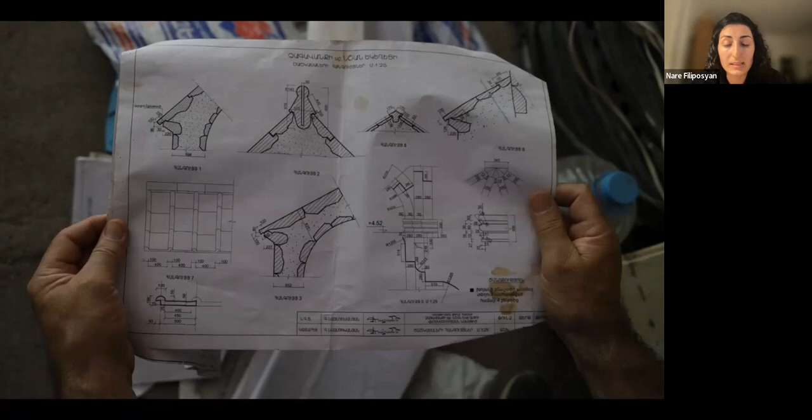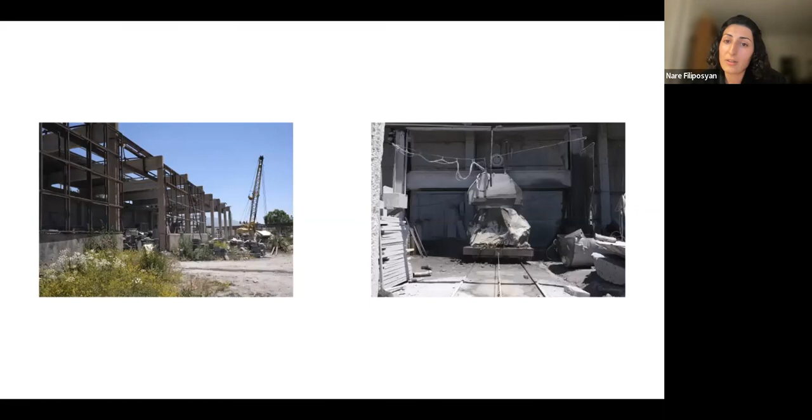The research underlying this thesis was an attempt to understand an existing culture of stone. It involved interviews in Armenia with masons, visits to medieval churches, quarries, stone cutting facilities, followed by remote conversations and my own experiments as a way to understand the techniques at play. The research is the basis for the proposition that I'm making for returning to stone.

To give you a glimpse, I'll share a 3-minute film of an extended conversation that I've been having with a mason. And if you speak Armenian, you will catch moments of frustration in his voice when I ask questions that clearly show a lack of an embodied understanding.

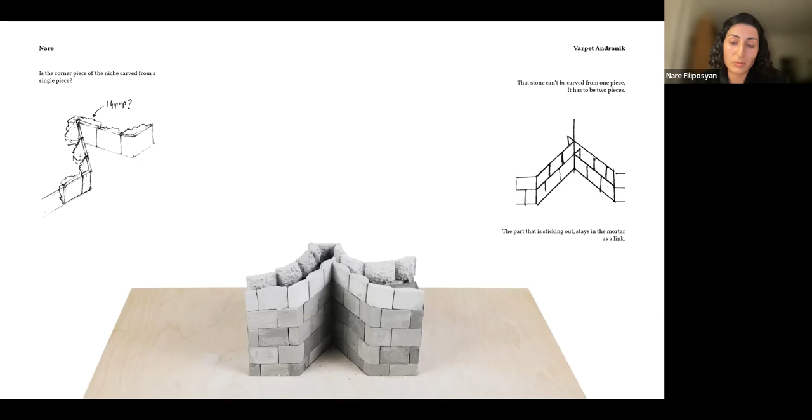Through the process of making models or modeling this process, I attempted to produce an embodied account of the techniques at play. What becomes evident in this exchange is the difference between theoretical and embodied knowledge. It is the difference between knowing whether the corner of the squinch can be built with a single piece of stone or not. The mason is giving me a piece of theoretical knowledge in the drawing form, which I am enacting in order to acquire an embodied understanding.

This image of masons drawing on stone, with stone, about stone, highlights the fact that embodied techniques that they hold cannot be abstracted into architectural drawings and are attained with stone and through stone. So by focusing on the embodied knowledge of the masons who have produced this architecture, I suggest deprivileging architectural objects and seeing it as the outcome of the work of the masons.

Currently, there are 3 strands of stonework in Armenia. A method called Medis, dating back to the 4th century. In this method, 2 layers of dressed stone are filled with lime mortar and rubble stone to create a structural wall. The stone acts as a false formwork during construction. Once complete, it protects the middle layer from the elements, making it a long-lasting system. Most buildings prior to the Soviet era are built with the Medis technique. However, this method of building is dying out, and there are only a handful of masons that hold this knowledge.

Then there is the industrial method, wherein poured concrete or CMU blocks are clad with thin stone tiles. Driven by efficiency and standardization, this has become the dominant way of building in Armenia today. In this economy of stone, value is derived from the thinness of stone, which no longer has a structural role. The thinner the stone, the higher the profit margin. This tendency to think of value only through financial terms comes at the expense of cultural values, such as building a house that will last for multiple generations.

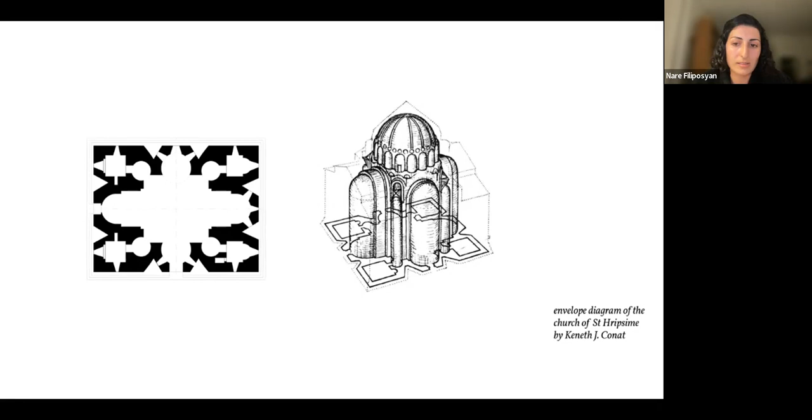The only elements that reveal interior transitions are the squinches, which are triangular, half-conic niches carved from the outside of the wall. This is a key element that appears in many of the medieval stone buildings. It acts as a way of corrugating and strengthening the wall, as well as a method for reducing the overall volume of materials, while other times it is transferring loads from the dome to the foundations.

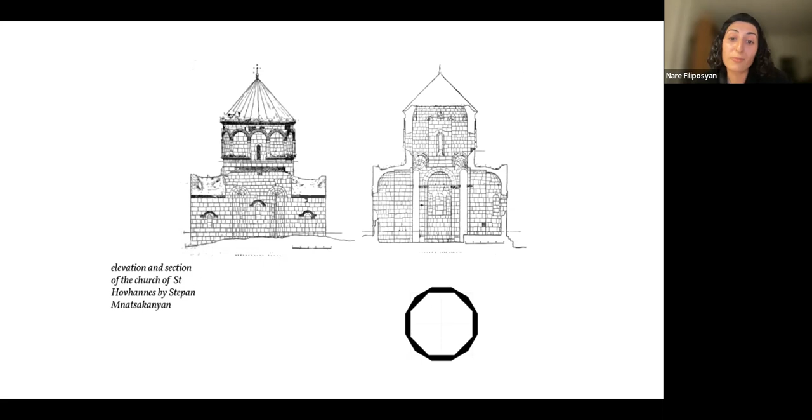To create a dome on top of a square plan, several geometric techniques are used to facilitate the translations of form and load. In this case, there are four squinches around the corners of the square plan. The squinches then support an 8-sided prism, which is nested inside a 12-sided prism from the outside. The dome is spherical on the interior and conical on the exterior. What I'm describing here is ingenuity and playfulness in form that is directly resulting from the building technique. Those are geometric games that the masons can play with stone using the Medis technique, which then results in a monumental piece of architecture.

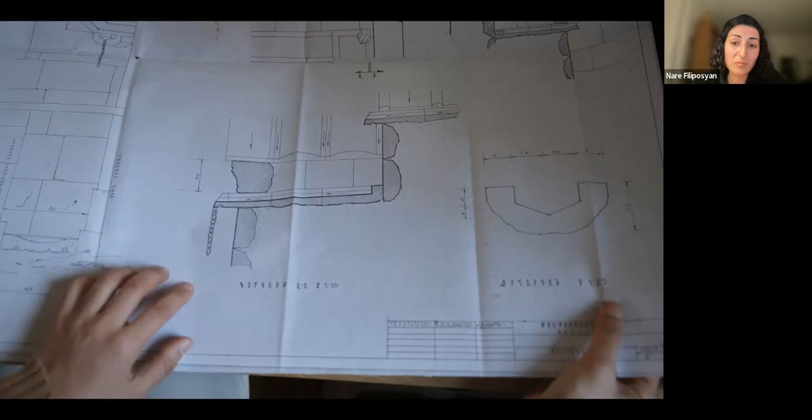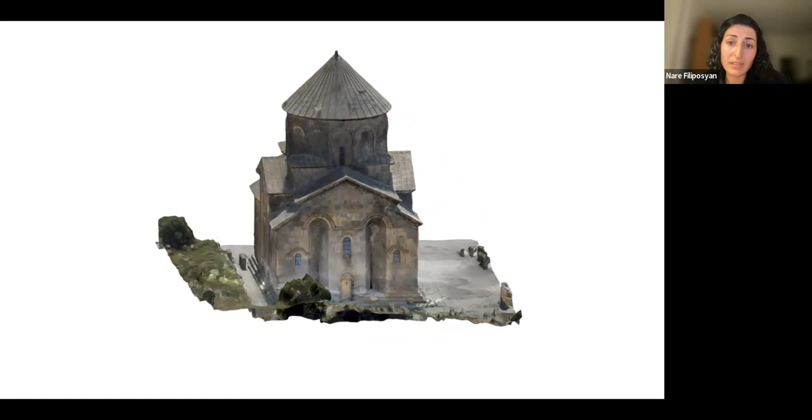During my research in Armenia, I gathered different representations of stone. Some of those representations are architects' drawings. Others are adaptations of those by the masons. They all exist with some level of inaccuracy in relationship to reality. Another representation of stone is a digital reconstruction of Saint Hovhannes that I produced using a series of photographs. Just like the architect's drawings, the digital model is attempting to get close to the stone, yet remaining inaccurate in its own way.

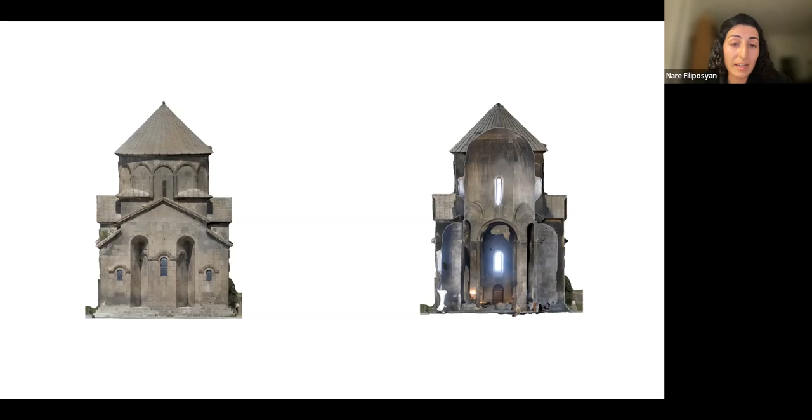What the digital model enables is the legibility of the seams of individual blocks, which then begin to reveal the work of the masons, but only to an extent. The surface fails to convey how a given block of stone was carved, shaped, lifted, held in place, or how it is linked to the inner rubble layer of the wall. What I've tried to convey so far is that in order for a building craft to exist, it needs to be practiced. The knowledge that the masons hold, their embodied knowledge, that is, cannot be preserved by simply writing it down or by drawing it.

What I'll share next is a speculative project where stone is reintroduced into the contemporary context in new forms and relationships in order to preserve and advance the disappearing building craft. The techniques that are dying out are inherently monumental. The scale of a single block of stone, the proportion of a squinch, such as this one, relative to the human body, the physical labor, knowledge, and skills required to manipulate a heavy material like stone into this form. Those are stone constructions that embody monumentality in the civic sphere.

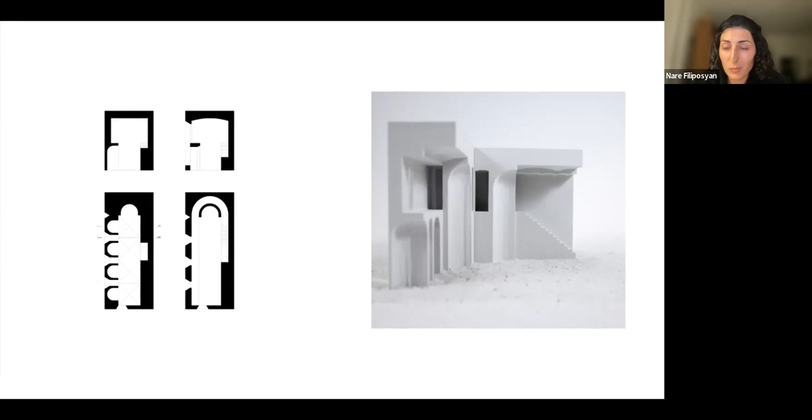What I'm proposing is an architecture that consists of monuments, with domesticity embedded in them, that together produce a house along a street in a town. The monuments are exaggerations, cognizant of the domestic scale. The outcome is a new unit of construction, which isn't the block of stone, but the monumental element that can produce architecture for various needs.

Those monuments are units of possibilities. What you're seeing here is a new architectural language derived from that same squinch from the Church of Saint Hovhannes. The typical elements of medieval Armenian architecture are being reconfigured into new relationships, resulting in architecture that can be inhabited at a domestic scale while preserving the monumental scale of the technique itself.

Situated in my hometown of Sisyan in southern Armenia, the project spans the ambiguous seam between the civic and the domestic spheres of my grandmother's house, street, and neighborhood. How do we carry things forward, but also look back? How do we carry things into the future that are not nostalgic and regressive, but allow for adaptations and changes?

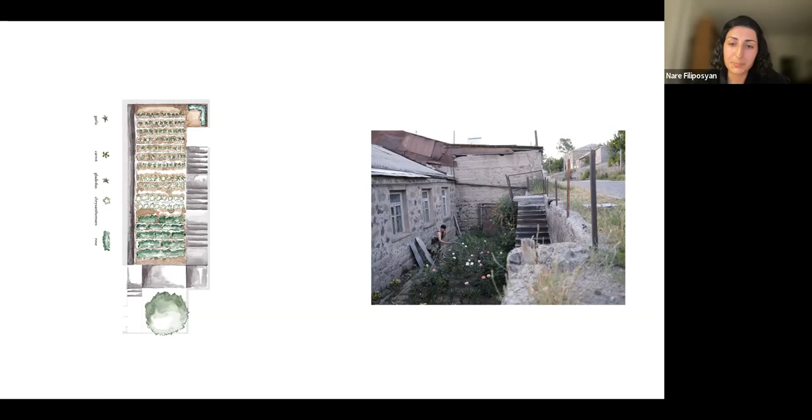The flower garden and the northern facade of the house are street facing, physically as well as programmatically, blurring the edge between what is private and public. The house is located between two terraced gardens, the flower garden below the street level, which then leads you down to the house, which in turn leads you out into the vast garden. The canal, which is used for irrigation, collects underground water and runs through everyone's gardens, creating unwritten rules about who waters their gardens when.

In this project, I'm taking an infrastructural approach by designing the backbone and allowing the rest to be filled in over time, be partially demolished and adapted. The main elements are the street, the retaining walls with fountains embedded in them, the curb, the monuments that constitute the house, the canal that runs through everyone's gardens. They're placed in relationship to each other and are driven by the need to produce a private that is very much embedded in the public.

In each of those areas, the monuments I have designed produce deliberate interactions between the collective and individual inhabitants and the techniques of stone building that produce this architecture. Each design intervention results in a singular monument that synthesizes multiple forces where stone is simultaneously a cultural, structural, spatial, and a thermal condition.

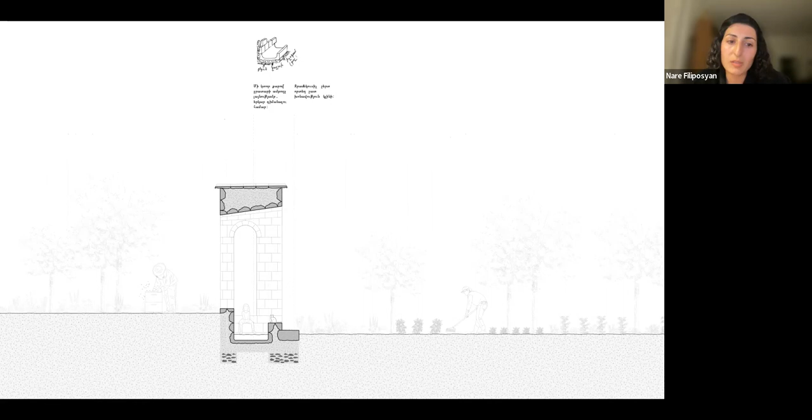Let's begin in the garden with an element that stands above the shared canal. The canal is an infrastructure that, while physically being in the private sphere, is inherently communal, enabling the movement of water from one property to the other. The monument above the canal marks a grand gesture as you ascend from the house into the vast garden. On a hot summer day, you can sit in the sheltered space underneath the squinch and dip your feet into the cool water as you help yourself to raspberries, which in turn benefit from being near the canal for the higher moisture in the soil.

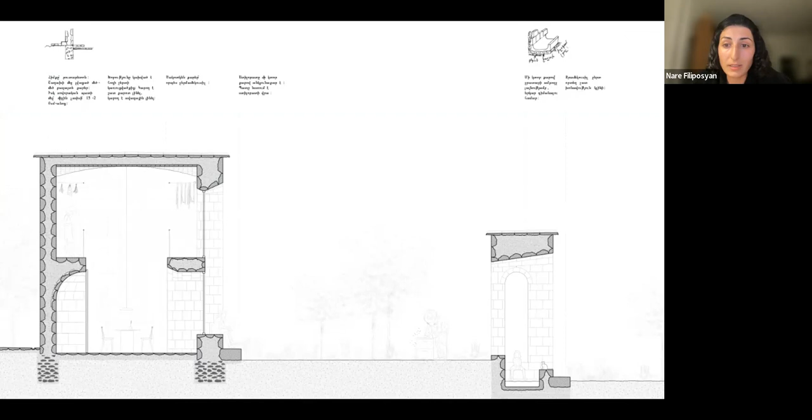If we move back to the house, we encounter another monument, the living room. This monument is exploring the potential of stone for inhabitation. The less massive, south-facing facade may become very warm, but that warmth would get absorbed at different rates into the deeper parts, creating different microclimates within the space. The outcome is monumentality and mass in appearance, yet differentiation in terms of comfort and domesticity.

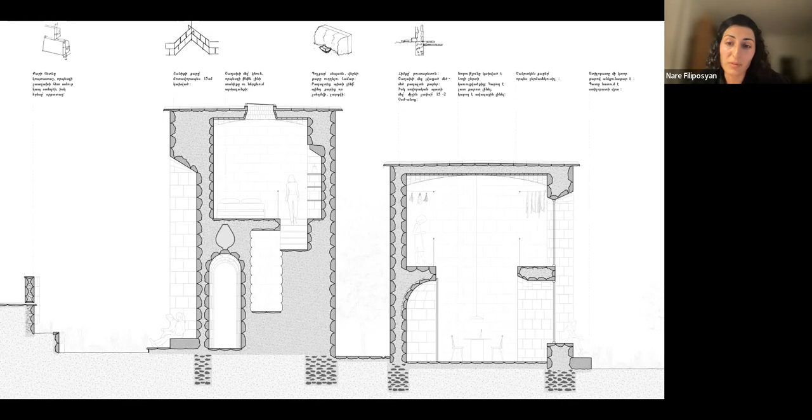Adjacent is a monument where a bedroom is embedded in the second story. You walk through a widening hallway, take the stairs up, and arrive at the bedroom, which is at the top of the squinch. Through its design, this monument allows for the mason's technique to be perpetuated, but also it produces a new architecture that places the inhabitants in new relationships to those monumental stoneworks, such as being at the top of the squinch. In other words, what I'm trying to design is a way in which both the technique of the mason moves ahead of time and the awareness of that technique is made legible to its inhabitants.

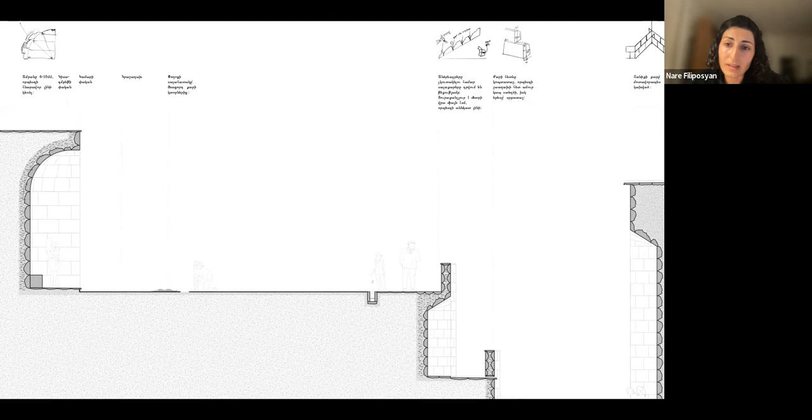Leaving the house, we're in the street, where we can understand this project not as a tabula rasa replacement of the neighborhood, but a slow and incremental process, where the backbone of the community would be built first, and the rest can grow over time, be partially demolished, and adapted by the next generations.

The construction of this retaining wall, which is a civic infrastructure, but designed with domestic sensibility of scale and attention to detail that allows the pedestrians to inhabit the street, would be enacted over time in order to perpetuate the activity of the masons. You see that the masons are building monuments along this wall in a strategic sequence that is scalable and can grow over time, move on to something else, and come back and modify it.

Moving out again, we can see in this section that all of this is woven together. In this proposal, architecture participates in the reconstitution and perpetuation of a culture of stone. The domestic monuments are design innovations that can produce cultural continuity and maintain the existing possibilities.

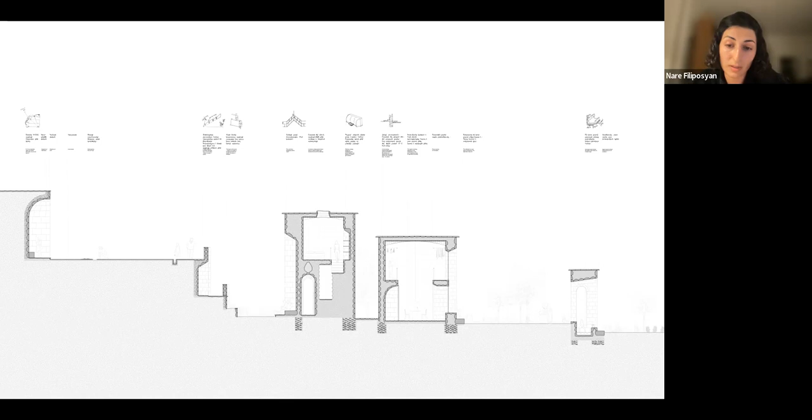The outcome is a new cultural fabric of stone with moments of intensity and punctuation that runs all the way from the civic to the domestic, continues from the curb to the canal. What I've shared with you today is a cultural inquiry through the medium of architecture. It is ultimately a conversation.

Therefore, the next step would be to return to the Masons. The provocation that I'm making here is to have an ongoing conversation between architecture as artifact and the embodied scales and techniques that produce that architecture.

All right. Thank you, Nare. That was amazing, on a number of levels. First off, I think that it's a tremendous amount of research that you went through, and it felt very deeply personal and professional in your journey. And before we get into some questions, I may just start it off and throw some out while people are putting questions into the chat.

And aside from the research that you went through, what struck me the most is the exploration and the explanation around something that appears so formal to so many people. And the way you were able to uncover the object, translate the structural techniques, the discussions with the masons, very much personalize something that seems very inanimate. And through that whole process, I was struck by the authenticity and the honesty in the structure. And this part, I think, is so hard to understand and explain.